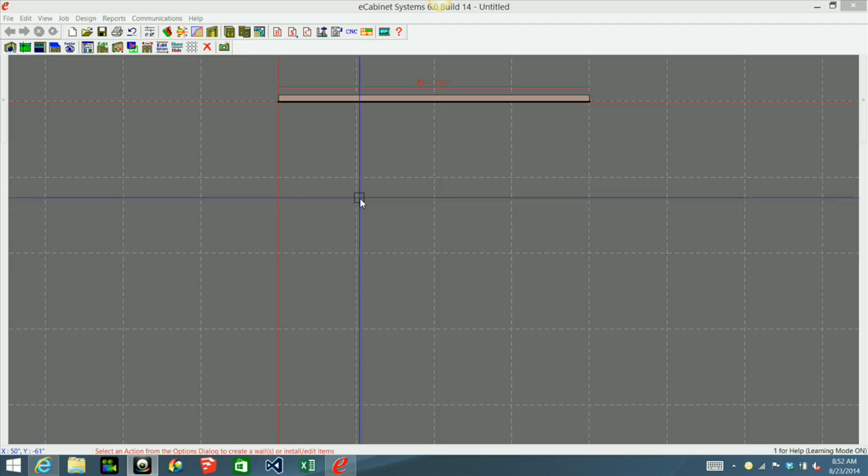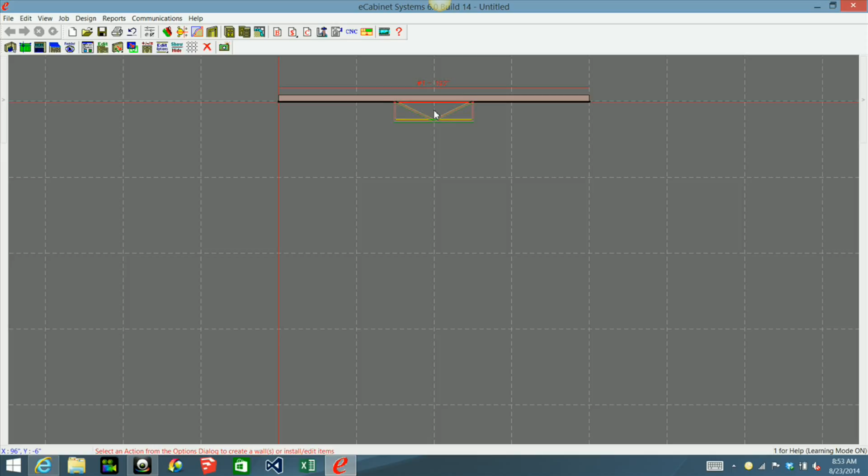Actually it doesn't. I'm going to show you how I do it. I'm going to take an upper cabinet, in this case with 4 doors, and place it here on the wall. You don't have to guess where it needs to go, but in this case I'm just going to place it against the wall and move it out 48 inches from the wall.

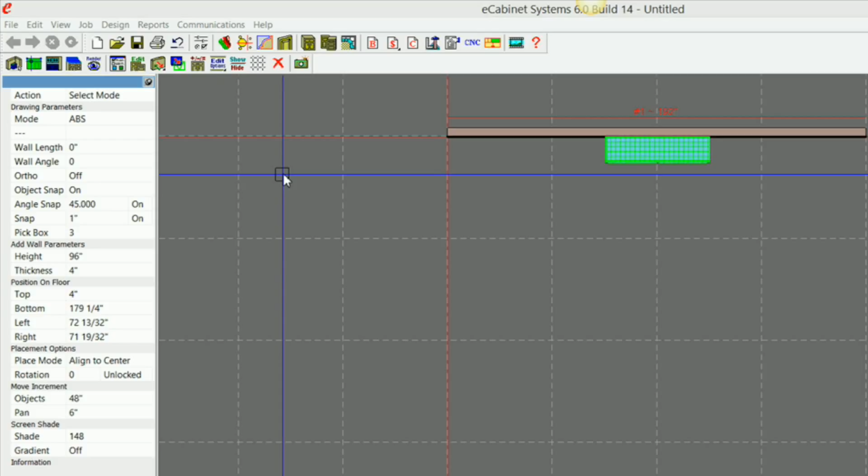So I've got 48 inches under my move increment here, under objects. I've got my cabinet highlighted, and I'm just going to hold down my shift key and hit my down arrow key to move it out 48 inches.

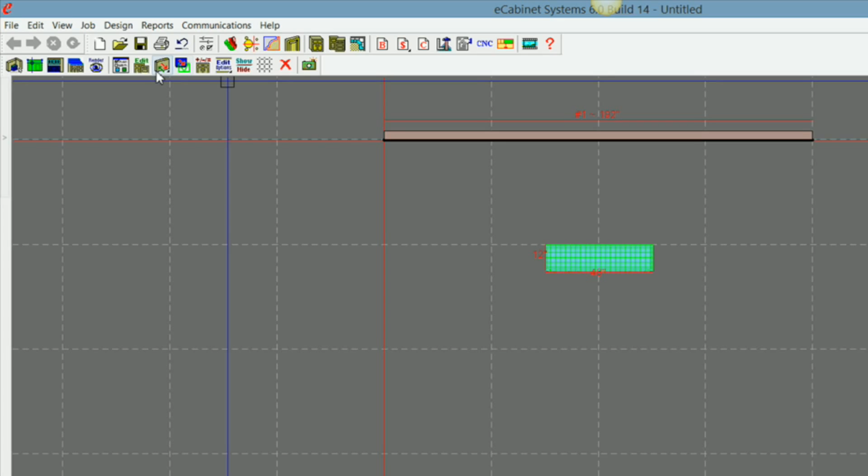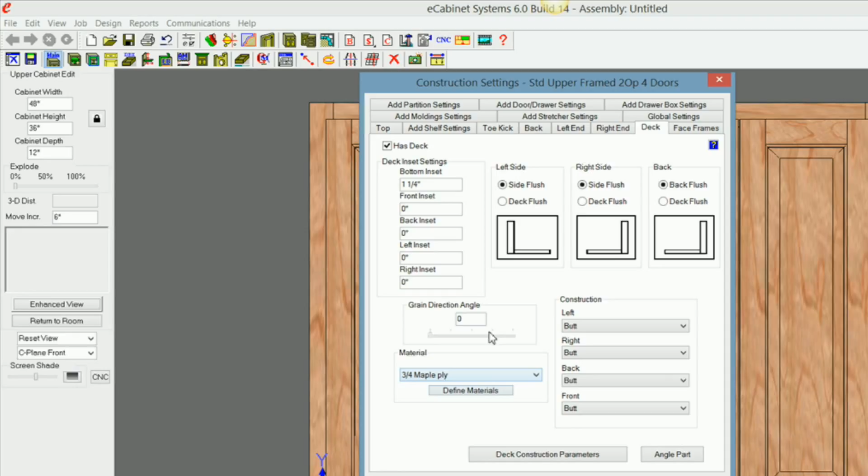Now what we need to do is create a cabinet with just a face frame. So I'm going to take this cabinet in Cabinet Editor, highlight the cabinet, go to Edit, and in Settings and Preferences make sure everything is butt joint and I don't have any insets. Deck float, let's change that to 0. And the back, everything is butt. So now click OK.

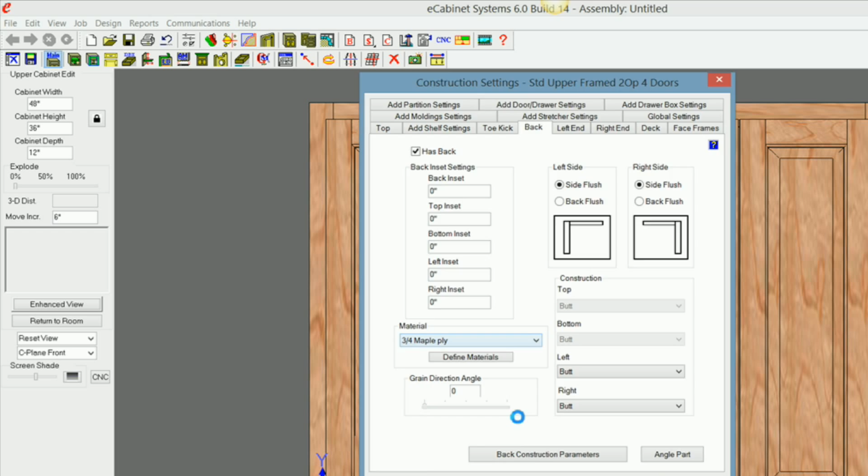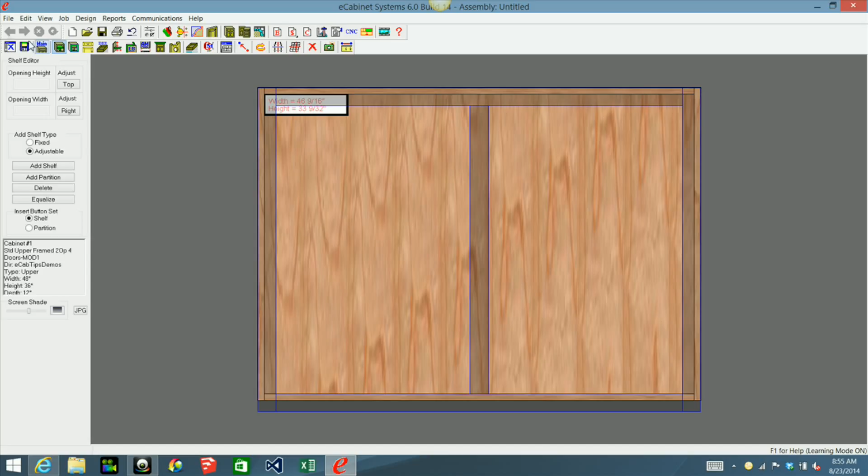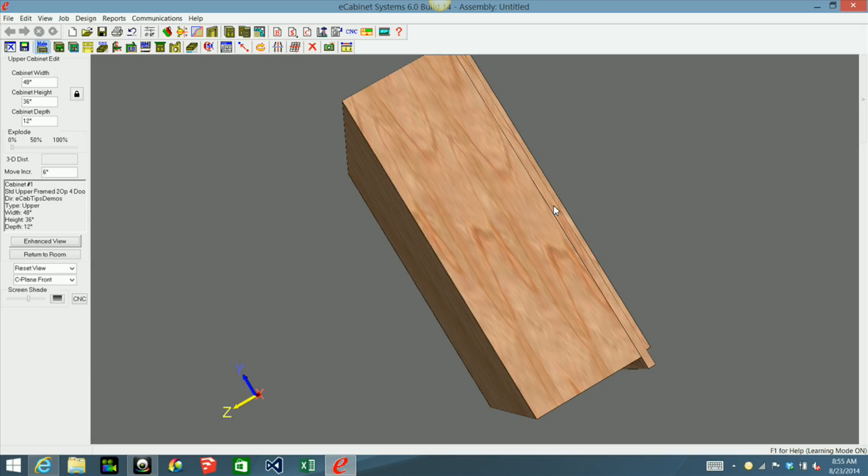Now we're going to want to go into Shelf and Partition Editor. Currently there are no shelves or partitions in this cabinet. If they were, you would want to go ahead and remove that. That's 36, so that's fine. This cabinet is 36 inches high, I was just making sure that this frame height was the same.

Now we're going to remove the top by clicking None. I'm going to remove the back by unchecking Has Back. Uncheck Has Left End, uncheck Has Right End, uncheck Has Deck. And then in face frames, we want to make sure we don't have any scribes. If you want a scribe you can put one there, but usually I leave it 0. Now I'm going to click OK.

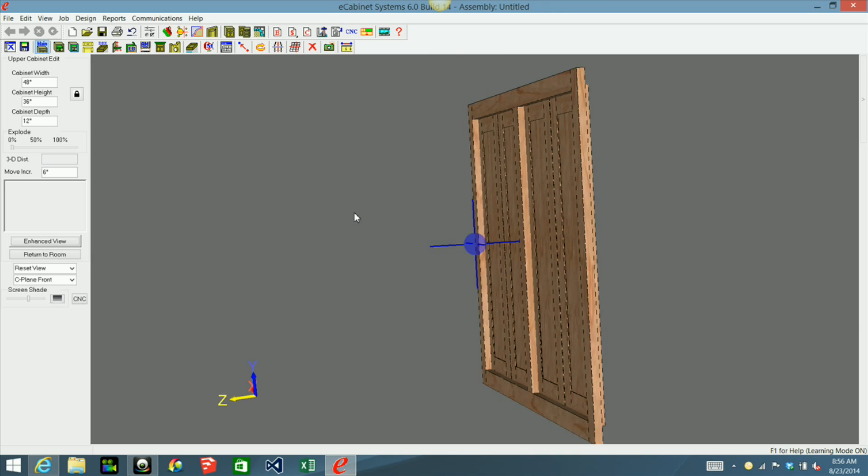And as you can see, the only thing we have is a face frame with 4 doors on it. So let's go home, and I want to change the depth to the thickness of my face frame, which is 3/4, and hit enter. Now this is in the center of the origin.

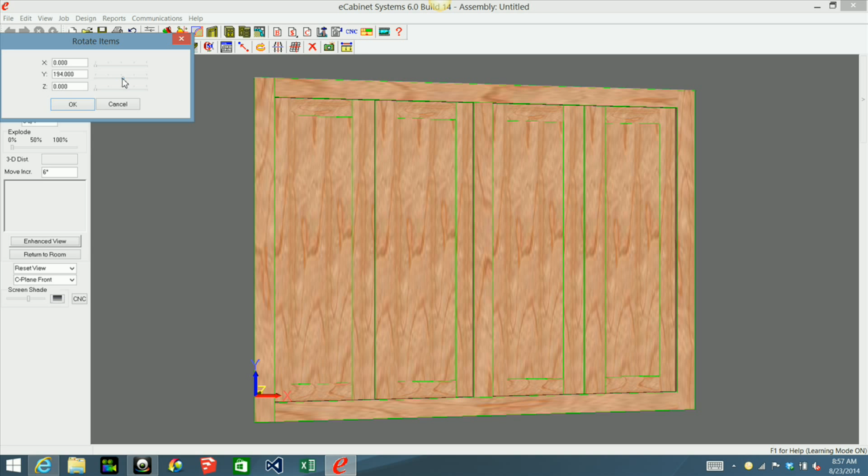What we could do at this point, since we want this to be on the back of the cabinet, we should be able to double click and select the whole cabinet, or highlight it like that - I don't think that'll work. I'm going to double click and rotate item, rotate it on the Y axis so that it is backwards. Actually, I'll tell you what, we may want to use this for something else, so let's not do that.

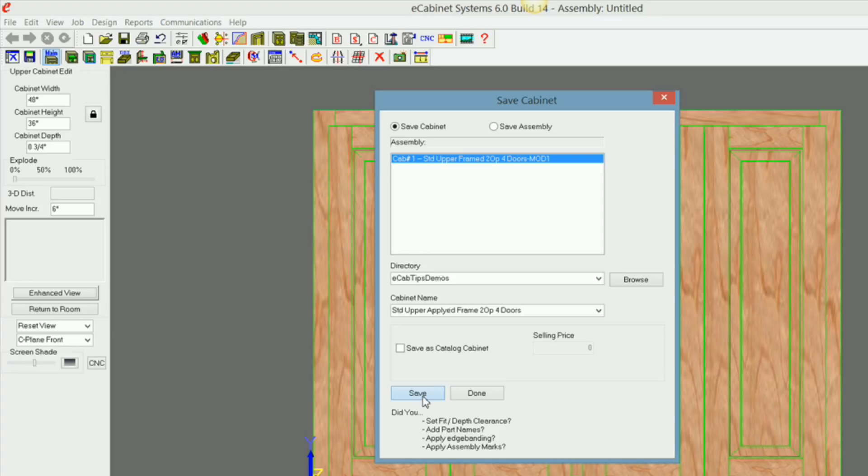Right now we just want to save that cabinet. So I'm going to click on save, just like you would any other cabinet you're developing. I'm going to change the name right here to 'standard upper applied frame to open 4 doors.' I'm going to click save, saving it under the same directory as a cabinet. You'll see later on why I'm doing this, but for now, that's what we're going to do.

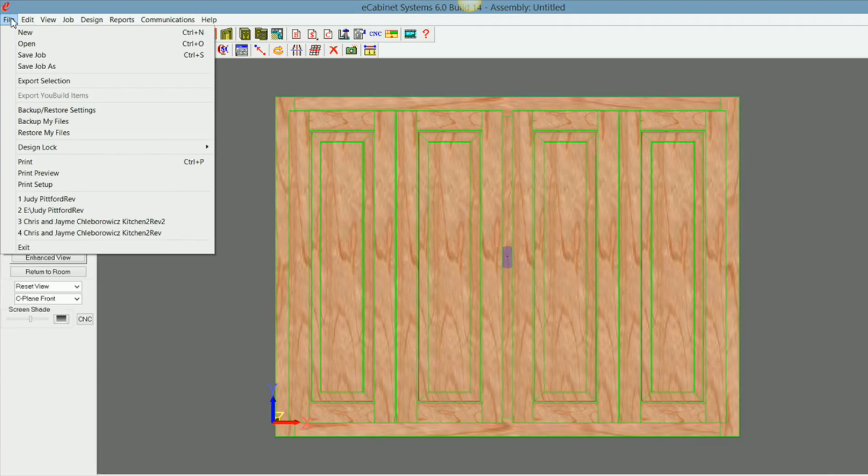Now we need to turn around and double click on the cabinet again. This time we're going to go to File, and we're going to go to Export Selection. Now it brings up this Save As dialog, public documents, Thermwood, eCabinet systems, import, and right now it's in a folder that I created called test.

You can create a new folder and name it whatever you want, and this is how you would go about doing that. Just click new folder, and I'm going to call this eCab Tips Demo. And click. Let's see, I don't want it under that, I don't want it under my test directory.

Let's do this again. File, Export Selection. I don't want it in my test directory. Oh, I can't create a new folder. So, public documents, import. Let's see, I can't go back either. Okay, so import.

Okay, now I can create a new folder. Import, I'm going to call it eCab Tips Demos, and enter. Now I can double click this. So now I'm under public documents, Thermwood eCabinet systems, import, eCab tips demo.

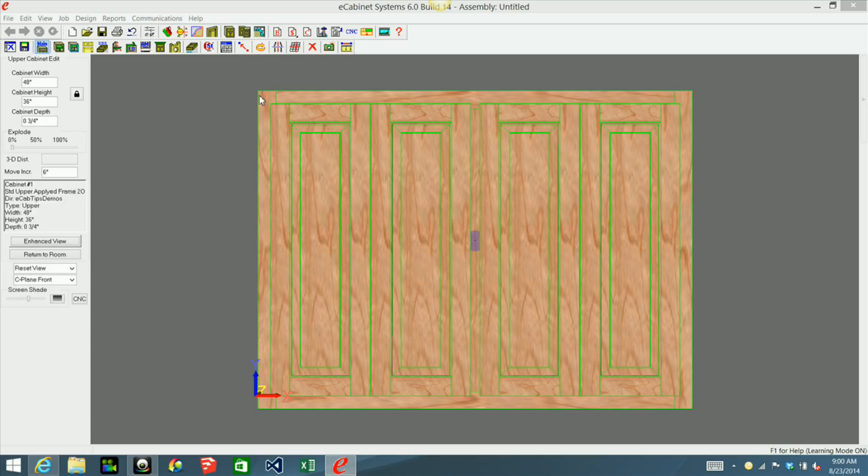And I'm going to name this 'upper to opening 4 doors applied frame.' Okay, and save. Now what we've done is we've created a display object here. This is no longer a cabinet. So I'm just going to back out of this.

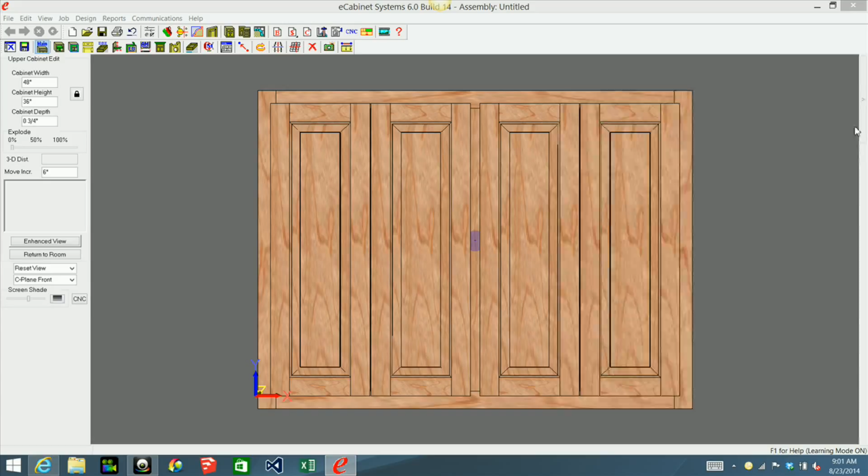Let's see, we've got it saved as a cabinet and we've got it saved as a display object. Let's double check and make sure. Okay, there's our cabinet. If we go to display objects and we find this file called eCab Tips Demo, we should have it right here. As you can see, it has no image. So we've got it saved.

So let's just return to the room, and no, I do not want to save the changes. Now we're going to bring this cabinet back into Cabinet Editor, and I just simply want to remove the back. Make sure it doesn't have any insets, and uncheck has back, and OK.

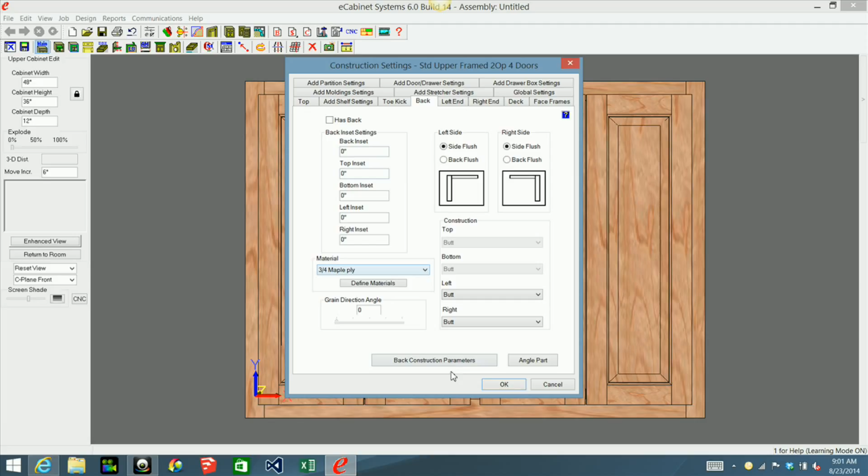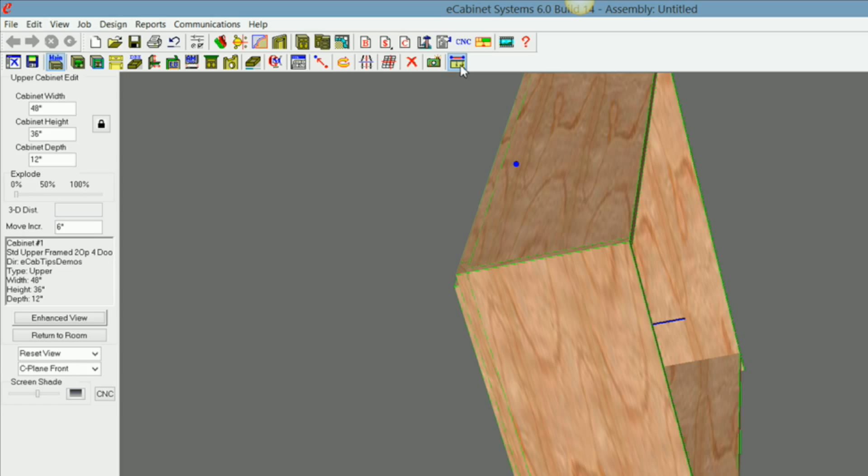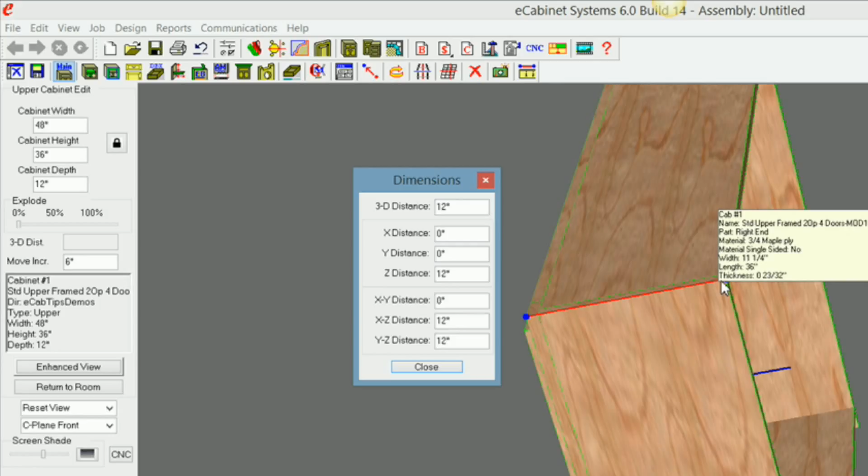Now, as you can see, this cabinet is still 12 inches deep. If you want it to be exactly 12 inches deep after you put the frame on, you're going to have to accommodate for the face frame thickness. As you can see under dimensions here, I'll click on the face frame in the back. The Z distance is 12 inches, so what I'm going to do is change the depth to 12 minus 3/4 and enter.

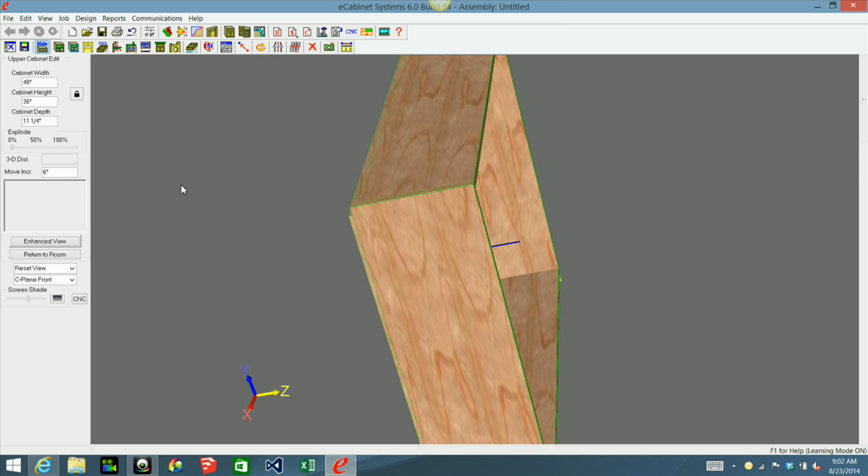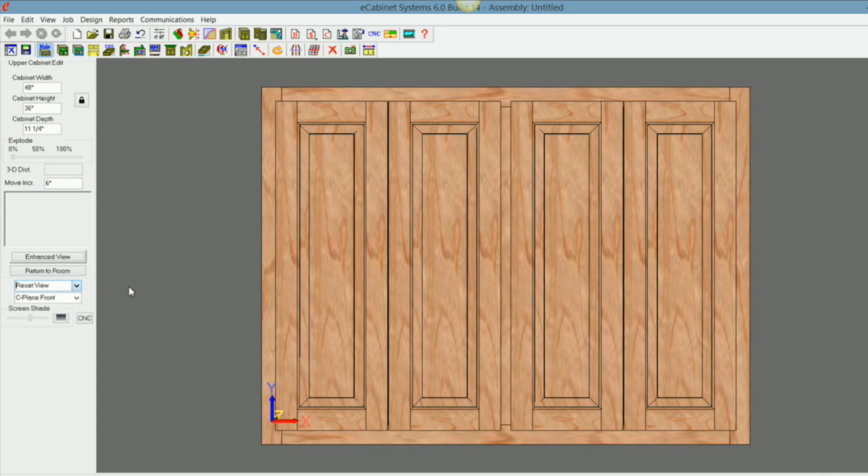Okay, if I go home, now I can bring in, under display objects, this frame we just created as a display object. Let's see, if I go to back view, reset view, back, you can see the frame in here.

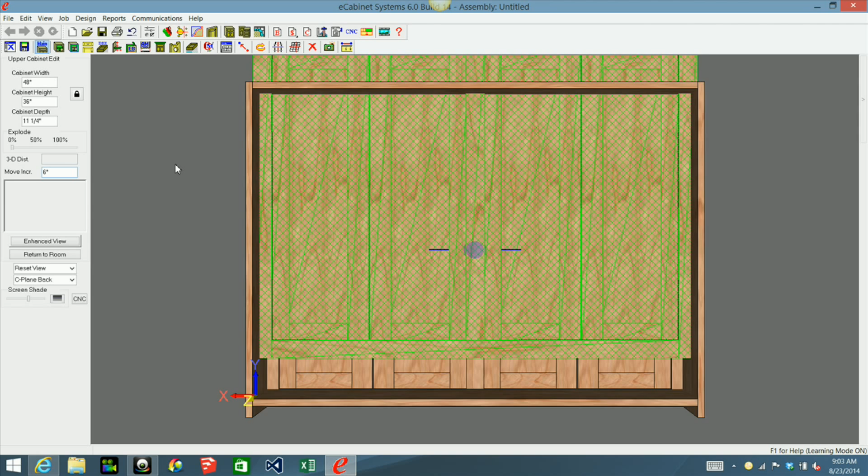If I click on the frame, I can move it up about 6 inches here, using move increments just so I can get a hold of it good. Go back to home. Now I have my cabinet selected. Let's look at the left end here. We're going to have to rotate that.

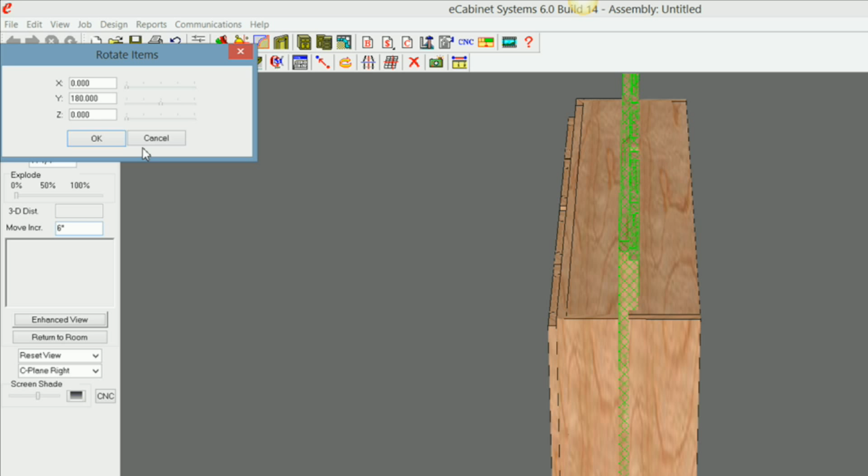So I'm going to right click and rotate item. I'm going to rotate it on the Y axis 180 degrees. Now I need to double click my cabinet, double left click.

I'm going to use my align tool. I'm going to click on my cabinet first. Let me get it rotated so I know that I'm on this corner here. You don't want to be somewhere else. I need to be right on this very corner right here.

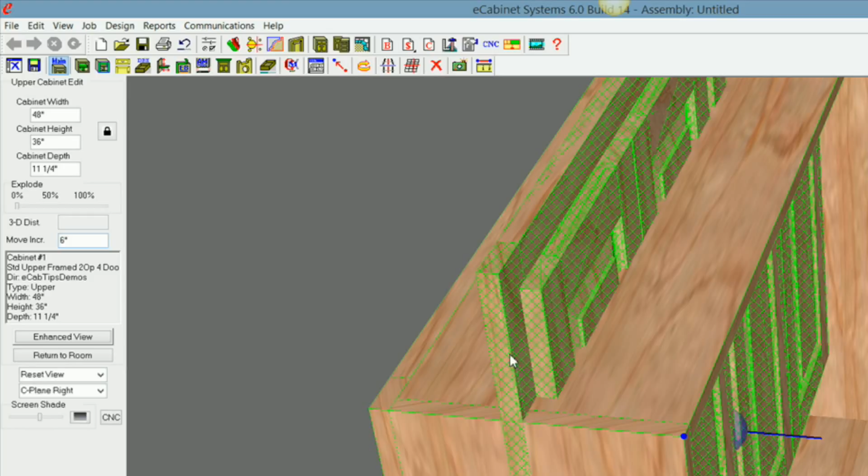Sometimes this can be tricky, okay, now I'm on that corner. The first object that I clicked on is the one that's going to stay stationary. The second object, or the red dot, is the one that's going to move. So now I click on my align tool again, and since I don't have a scribe on this, I'm just going to align to 0.

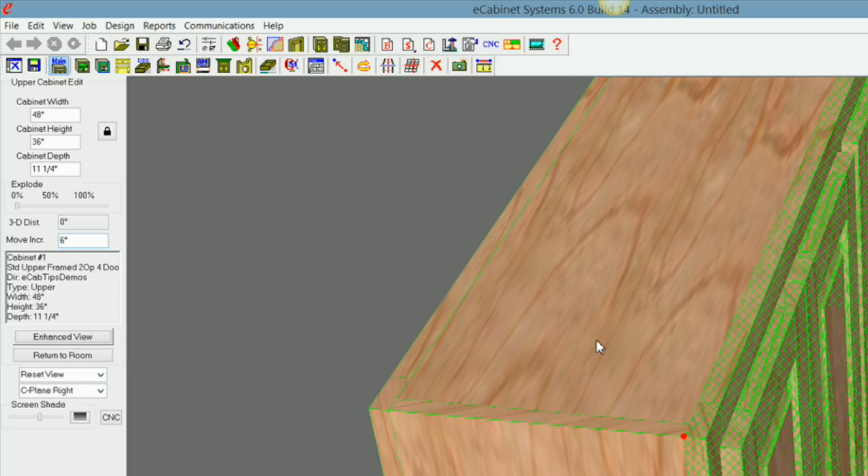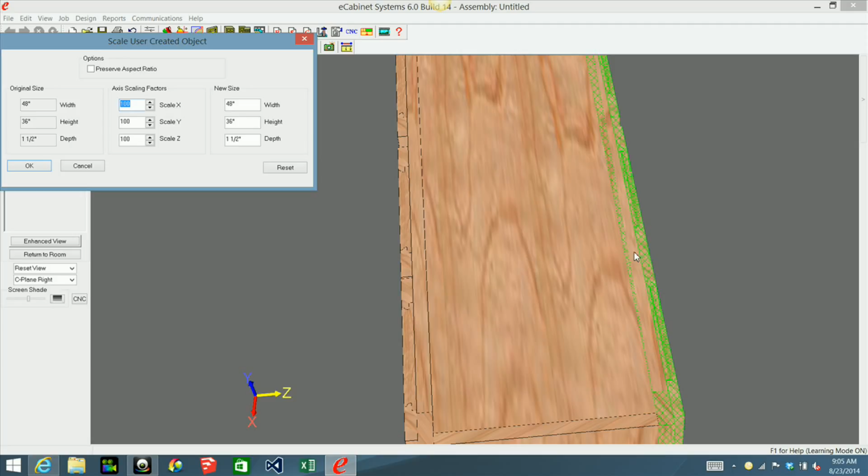Hit escape, escape, and escape. Now as you can see, the face frame is on the back side of the cabinet, and it's not going to tell you the size because this is a display object, but you can click on it, right click, select scale object, and make sure that your height is correct. It's saying it's 1.5 inches deep because it's including the doors, but that's okay.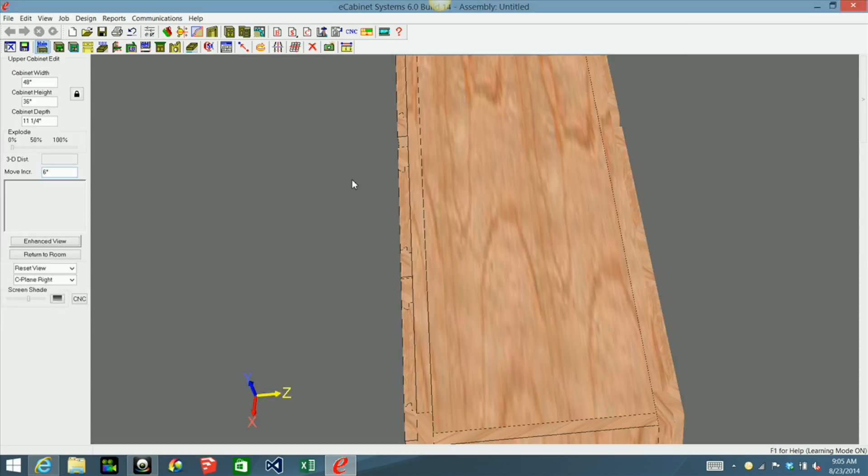So what we need to do, since we got this highlighted, we need to double click on our cabinet, right click, and go to associations to associate the cabinet. Now we can return to our room, click yes, and as you can see, I'll zoom in here, we have our frame on the back side of the cabinet with the doors.

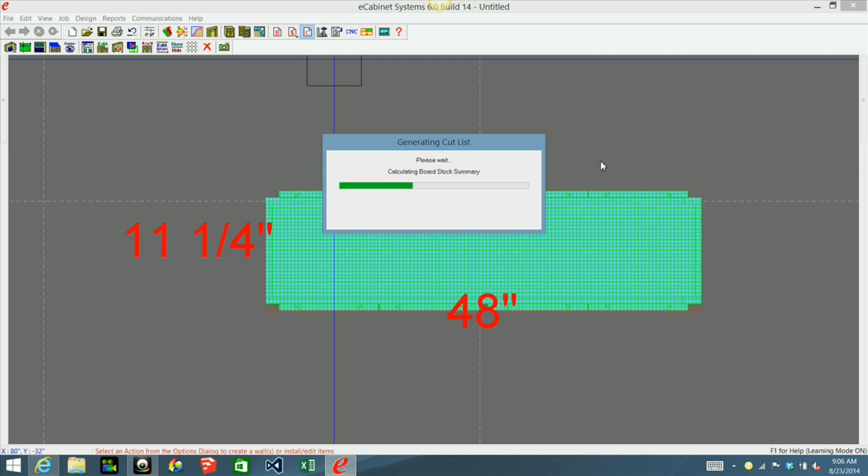Excuse me. Now, because this is a display object here, if you run the cut list on this cabinet, you will not see anything for the face frame and doors. There's nothing in here. You see I have 4 doors. There should be 8.

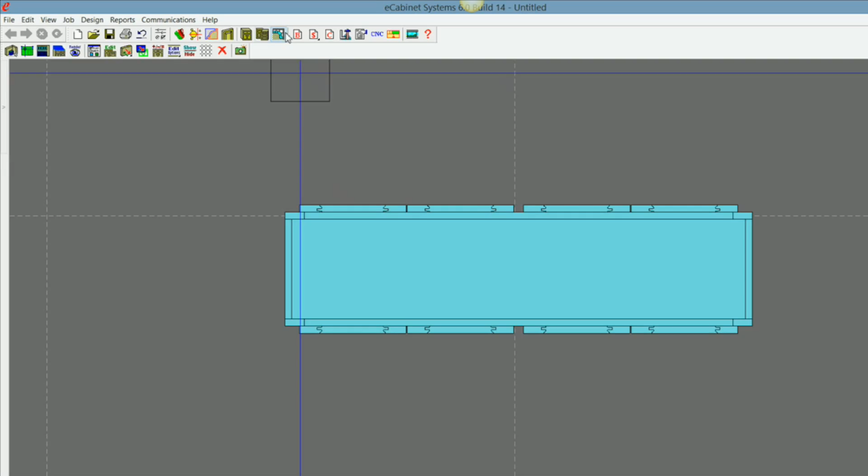So what we're going to do is go to batch, and I've got this one in here already where I practiced, so I'm just going to remove this. You're going to go to the library that you saved that frame or cabinet in, and I've got this one right here: standard upper applied frame, 2 opening, 4 doors. I'm just going to click on it, keep it the same size, and click add.

And now we can rename this if we want. We can name this Island Upper, or whatever you want to name it, and click OK.

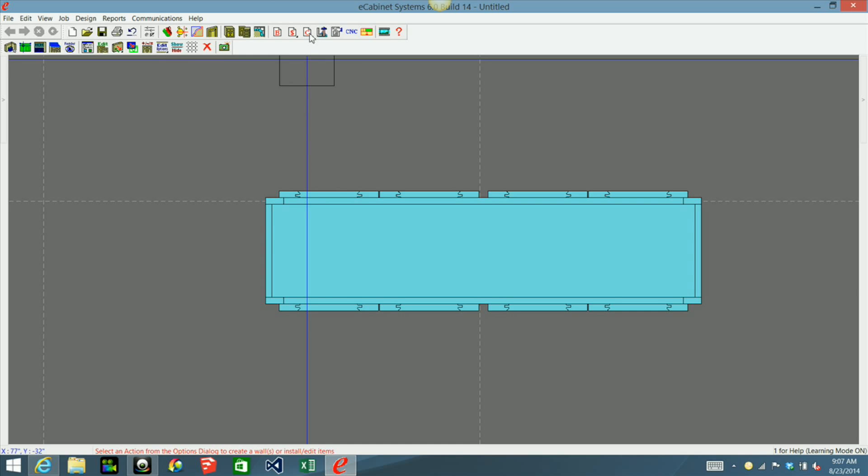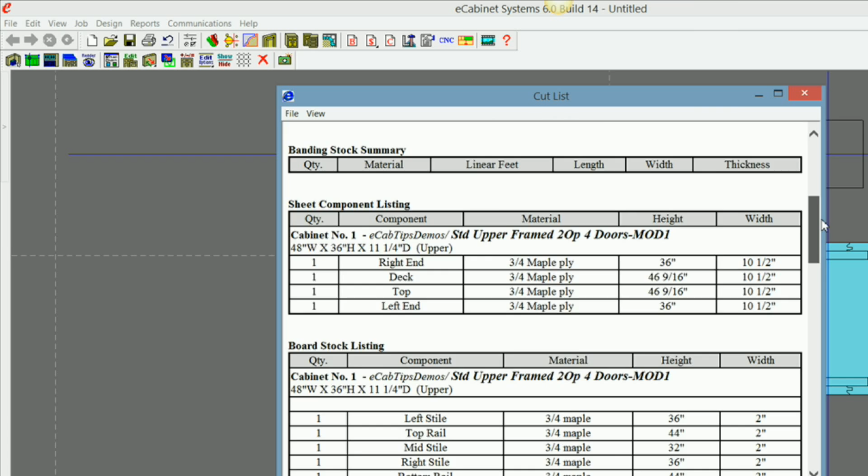And that's what's going to show up on the cut list. So now if we go back into custom layout and just click on cut list without highlighting anything, it's going to show us the cut list for cabinet number 1 - left stile, right stile, all that is in there - and cabinet number B1, which is our Island upper applied back frame.

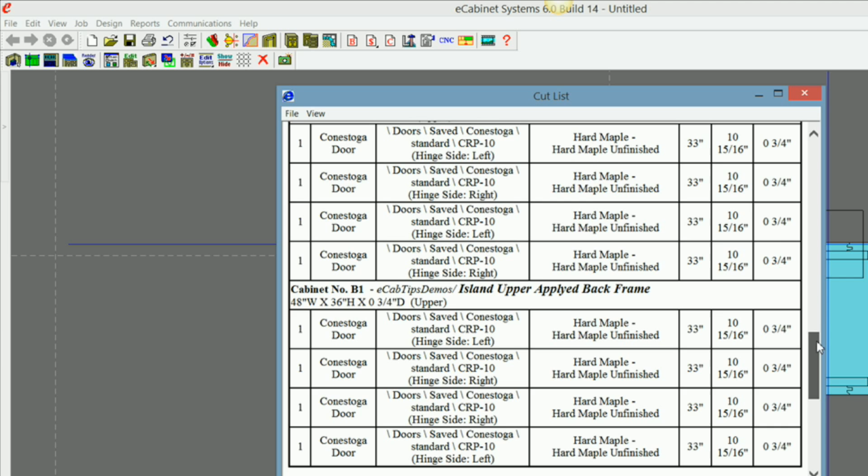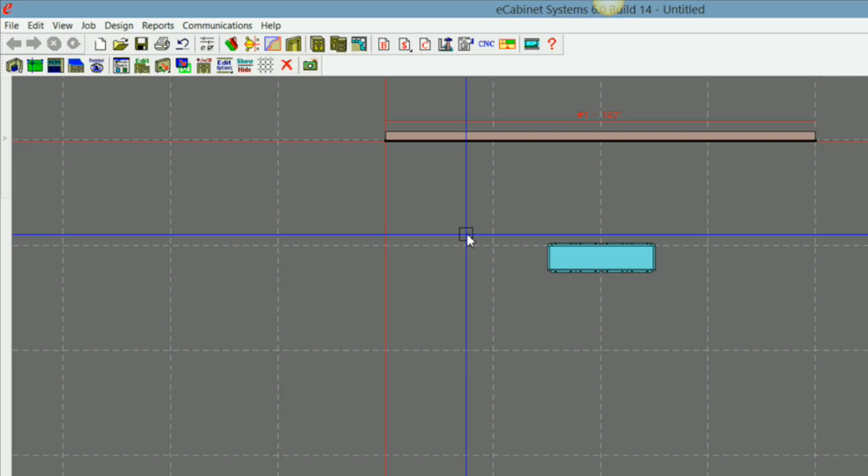And it should also show you the doors that go to it. So that's how I do that. And as you notice, this is not an assembly, so you don't have A1 cabinet assembly 1, cabinet 1, assembly 2, or assembly 1, cabinet 2, and so on. It's just simply 2 cabinets in the room, or 1 cabinet in the room, to show your customer what their cabinet's going to look like, with doors on each side.

And you also have the actual cabinet in your batch, your frame, so you guys can make the face frame and you can order the doors or build the doors however you prefer. I hope this helps.